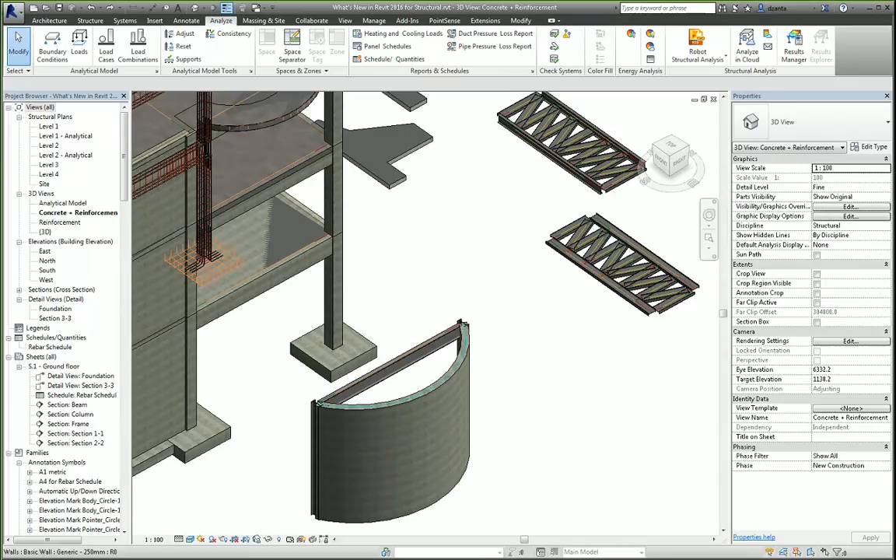In today's screencast, we'll be taking a look at the continuing series of screencasts on what's new in Revit 2016. We are on the fifth video, and this is more pertaining towards the structural enhancements. So here I'm in Revit 2016. I have a structural model open, and the next item on the list of what's new is the member forces dialog box.

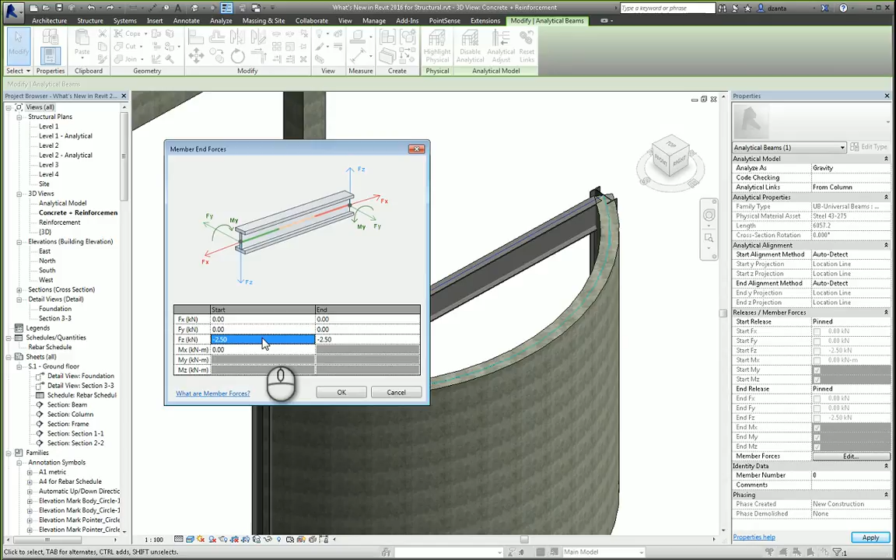What does that mean? When we look at our Revit structural model, we tab into and select the structural analytical model. For example, this beam. We can see here in the instance properties under releases and member forces, we have start release and end release that we can specify whether it's fixed, pinned, bending moment, or user defined. However, if we scroll down a little further, we'll see we have a new member forces dialog box that we can click edit. And in here, we can actually specify the forces in X, Y, and Z kilonewtons.

And as you specify them and use them, it's for the purposes of structural analysis to send out to Robot Structural Analysis Professional or some other structural analysis software. So you have that additional feature now.

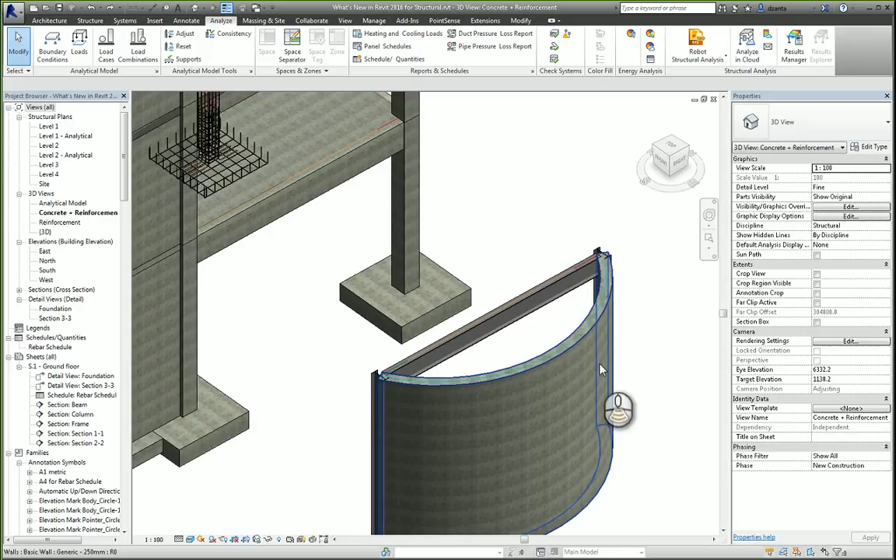The second thing that I'd like to cover for what's new in Revit 2016 for structure is area loads applied to arc walls. Prior to 2016, we could not use the Analyze tab of the ribbon, Loads command, and use hosted or non-hosted loads on a curved wall. We can do so now. Before you place it, you can actually specify orienting to either the host local coordinate system or the project. The default is host local coordinate system.

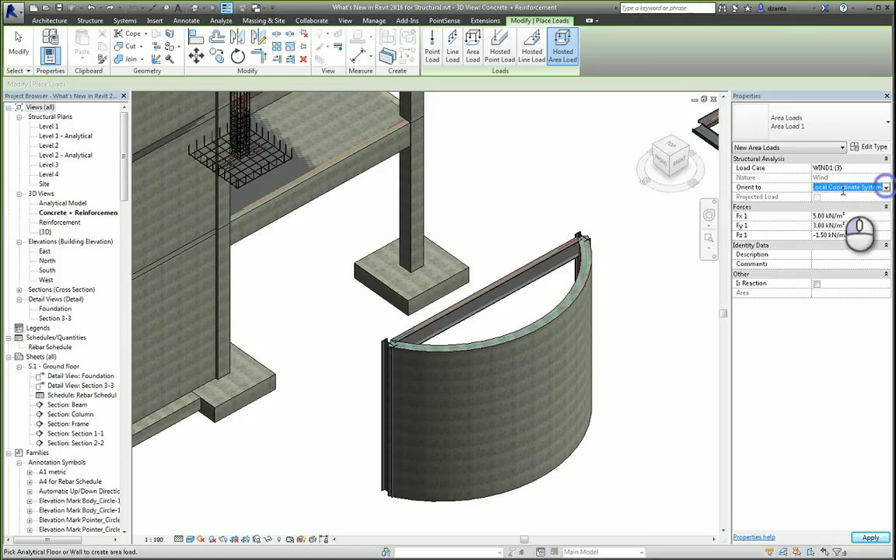And so when I select the structural model of that arced wall, you'll see the forces are placed accordingly. And you have the ability, obviously, to change the information for the forces in X and Y and Z. And your ending result will look like this. Now, I'm going to delete it, and I'm going to do it again. And I'm going to set it to the project orientation.

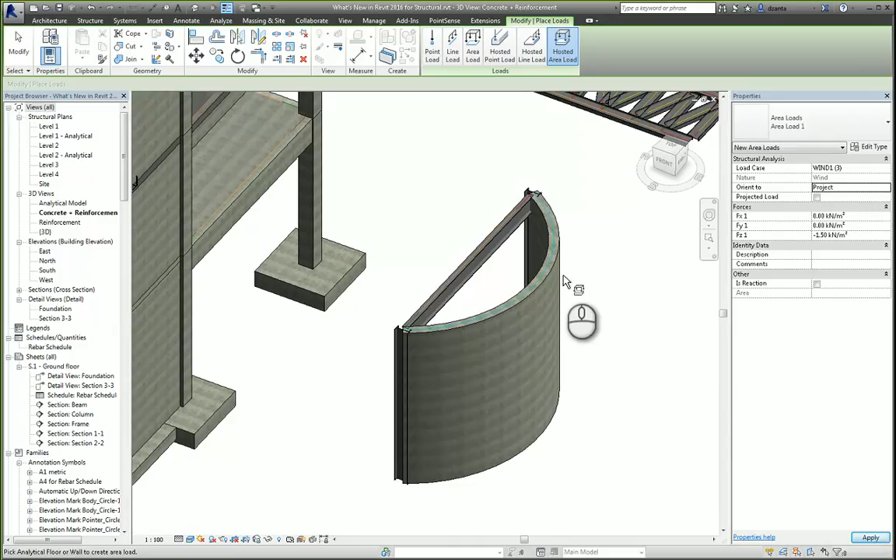And you'll notice that the forces in X, Y, and Z is strictly Z, negative 1.5 kilonewtons per meter squared coming down. And there may be situations where you need to do this oriented to the project because you want to specify maybe the forces in the X and not the Y and not the Z. When you finish, hit modify, and you've finished that enhancement command.

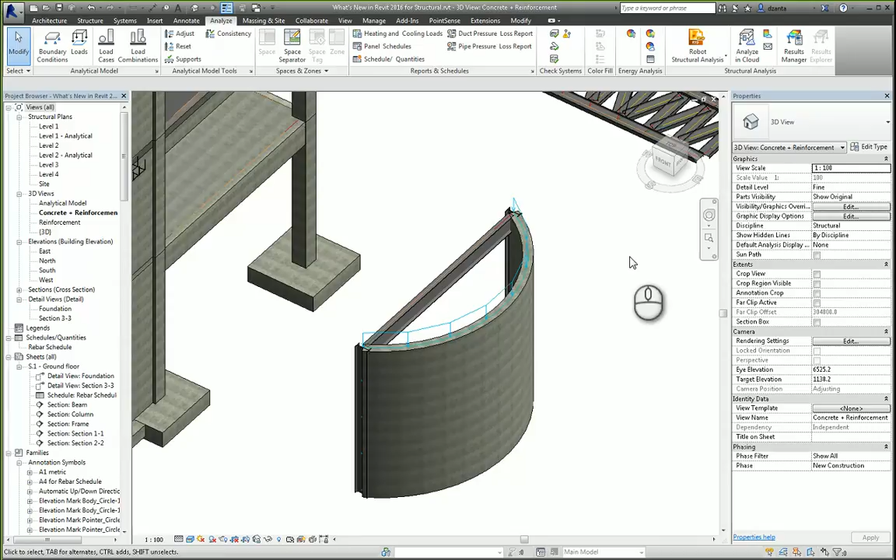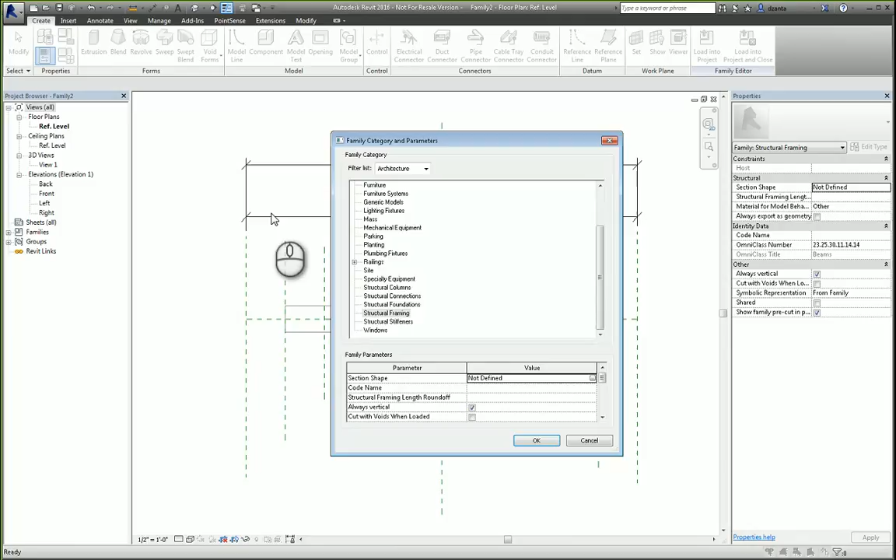The third thing I'd like to cover quickly is the section shapes within family creation, which is an additional parameter. For example, when we create a new family and head over to, say, structural beams and bracing, it opens up the family editor to our default beam template file. If we look at the family types window, we can see some basic information in regards to the parameters that are set up. In 2016 now, when you select the family category and parameters command, you can actually go over here, and now they have a section shape.

So you can go in here and you can specify a particular shape to work with. This window you can adjust and expand. You can pick any one of these section shape profiles to work with. So for example, I-shape parallel flange. I'll hit OK. And once you've done this, if you go back to your family types window, now you have all the structural analysis information as well. It's already been set up for you. So you don't have to go through the process of creating all of these parameters.

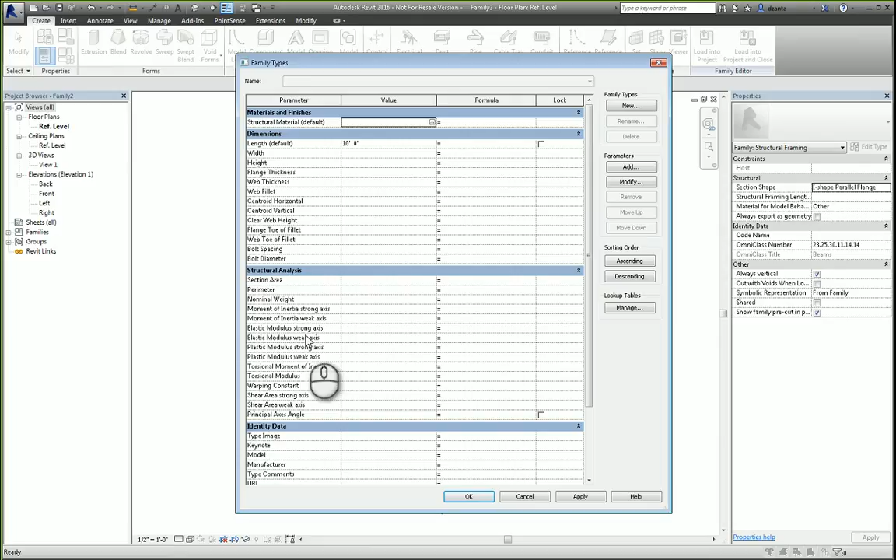Because if we take a look at any one of them, for example, and hit modify, you'll see it'll say it's a built-in parameter, not a family or shared parameter. And everything is already built in, it's locked down. You can't make adjustments to it.

And then another feature is rotating the chords within a truss. And what I mean by that is if we take a look at this truss, by default, when you draw it, it looks like this. So if I create one, it looks like this. However, if you decide to turn it on its side, like this, by specifying a rotation angle here of 90, it'll lay flat like it's supposed to.

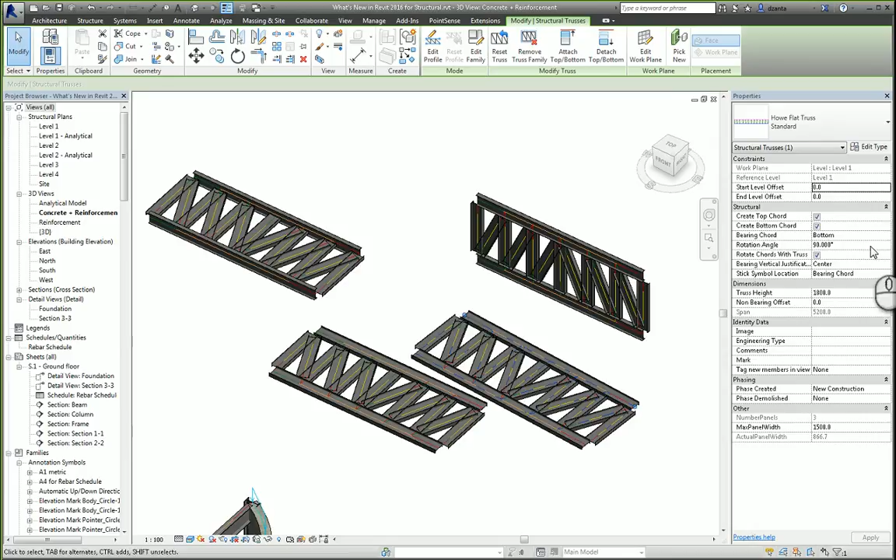But what if you need it to lay flat, but you need the top and bottom chords to not rotate? You can select that and where it says rotate chords with truss, uncheck it. And now it doesn't rotate the top and bottom chords and keeps them structurally the way you want.

And then we'll go ahead and do one last screencast for Revit 2016 structural enhancements in the next one.